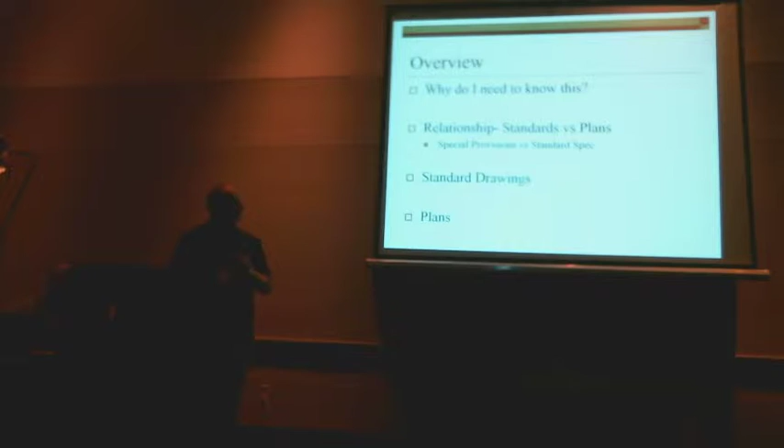So standard drawings and plan sets, why is this important? This is basically what we're going to cover: why do we need to know this, why do we need to understand plan sets, and then the relationship between standards and plans. We'll cover a little bit about the standard drawings and then also plan sheets. So I've got up here our UDOT standard specifications and also UDOT standard drawings, and I'll cover some of those.

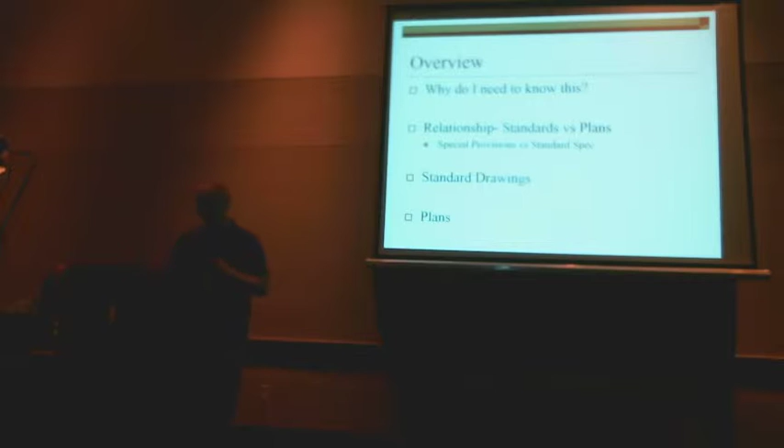Let's go next slide. So starting out in construction, I started with Idaho DOT about 15 years ago. Fresh out of college, they gave me a construction project. It was on a side road off of US 95. US 95 goes from the Canadian border to Mexico, so it's a well-traveled highway, US highway.

Off US 95, close to Sandpoint, Idaho, there's a road that the Burlington Railroad uses. On the side road, there's the railroad, and they were widening the road to accommodate an overhead sign structure that had the flashing lights for the railroad. And then also for school buses, they wanted to accommodate a place where they could stop, open the doors, safely cross. So the railroad was skewed at an angle, and this was also an area where they've had some accidents, so they wanted to do some safety improvements.

First thing going out, the contractor - you kind of have your larger contractors that are used to state construction work. This was the first time this contractor had state work, so he was unfamiliar with how state government operates. Really, going from one DOT to the next, they all have their standard specifications, standard drawings, and pretty much it's the same type of standards from one DOT to another.

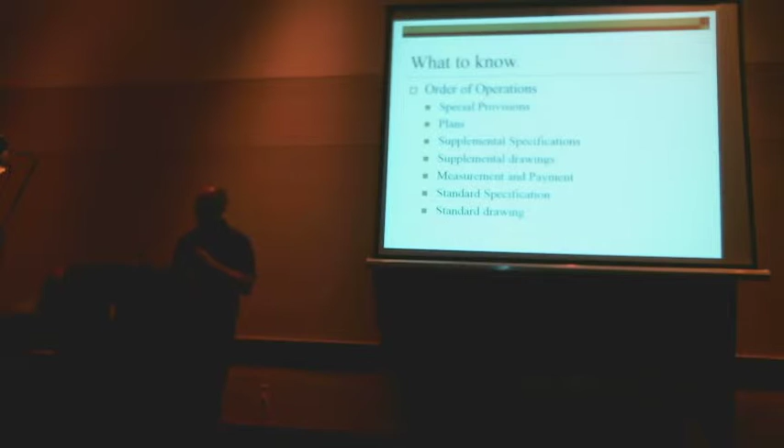In a contract, measurement and payment is for each item of work that the contractor does. It describes how things are measured and paid for. And then the other order of operations are standard specification and standard drawings.

So when do I need to look in the standard drawings instead of the specification? Like the previous slides show, the contract specific items come first, and they'll supersede the standard drawings. You would need to look in the standard drawings when your plans and plan specific items and drawings make reference to them, like on the crash cushions and different types.

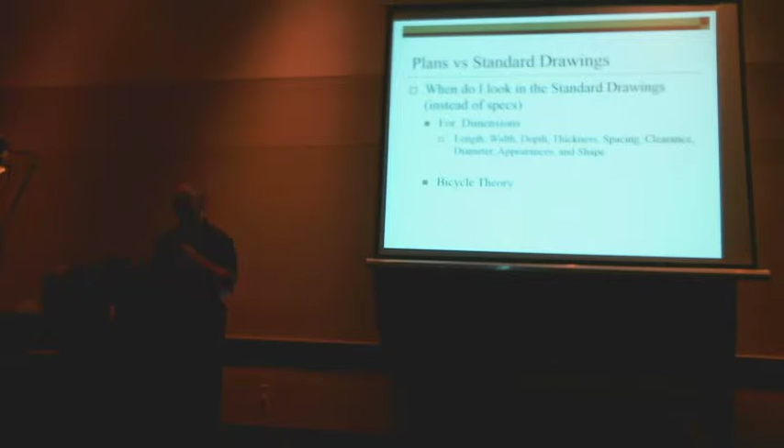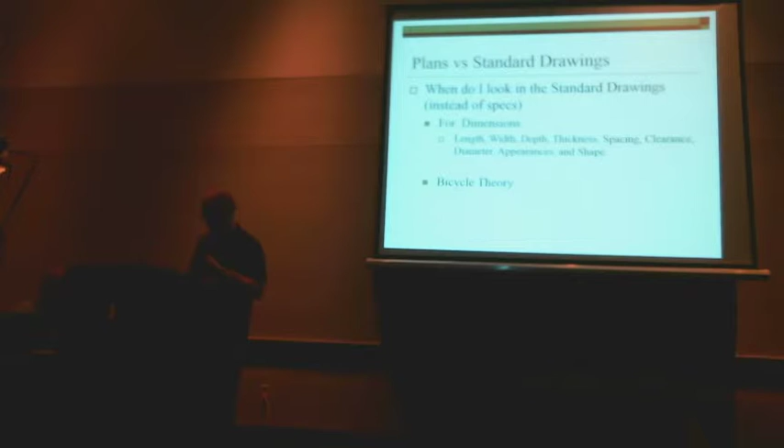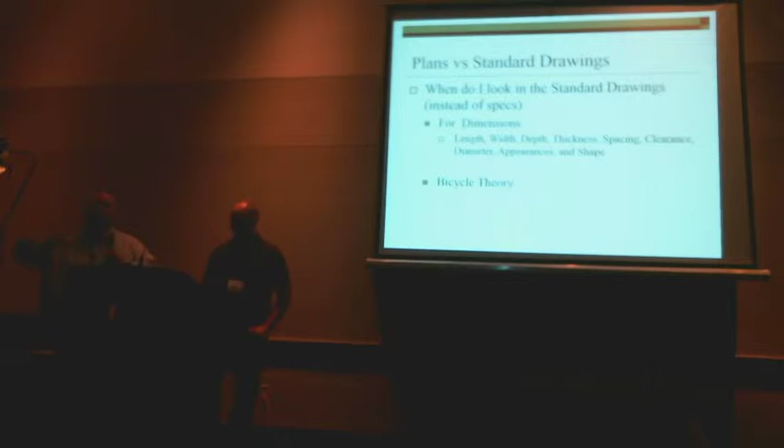What the bicycle theory is: if you're gonna build a bike, the frame will be in the standard drawings. It's gonna tell you the diameter of the wheels, the size of how to build the frame, how the frame is supposed to look. You'd go to the standard specification to know what type of paint, what color of paint, what the seat is supposed to be made out of, what type of reflectors. So one gives you the dimensions, the other gives you what it's made out of.

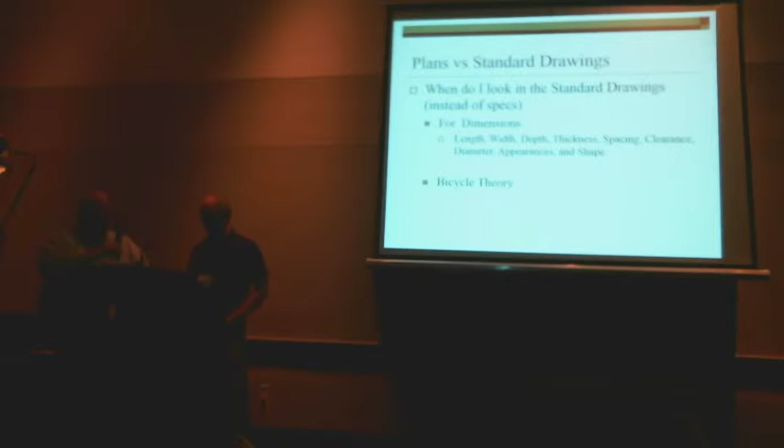Thank you. All right, let's go next.

So like we were describing, the first order of operation when you're looking at the plans is to look in the plan set first and the standard drawing second.

Generally speaking, plans tell you where to build it, and the standards tell you how to build it. Also look in the standard drawings when there's no specifics in the contract, then that's when you refer to the standard drawings.

And on maintenance contracts, and when UDOT does their own work, a lot of times they'll install items of work along the highway according to the standard drawings.

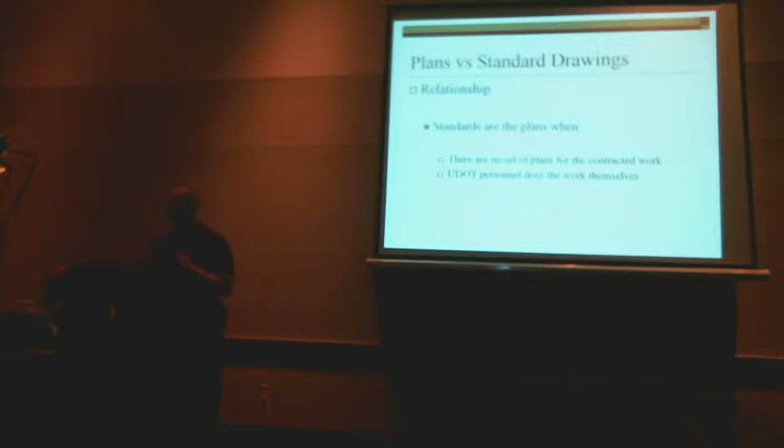On each sheet on the right side of the drawing, they've got a drawing number, title, engineer's signature - the engineer that designed and accepted the drawing - the date that it was accepted, and any revisions to it, all in that same title box.

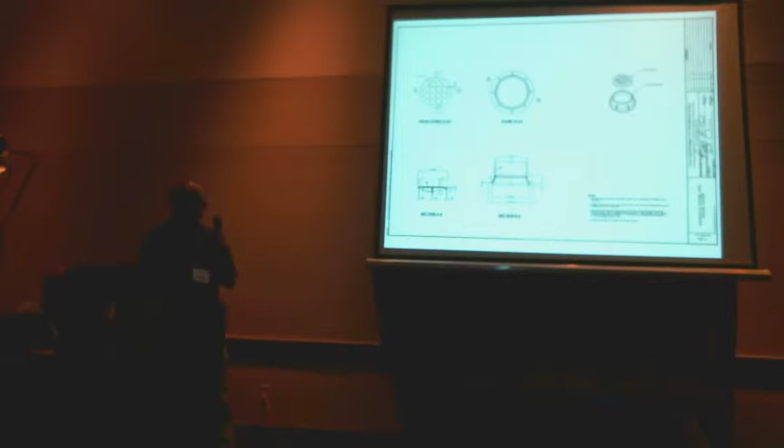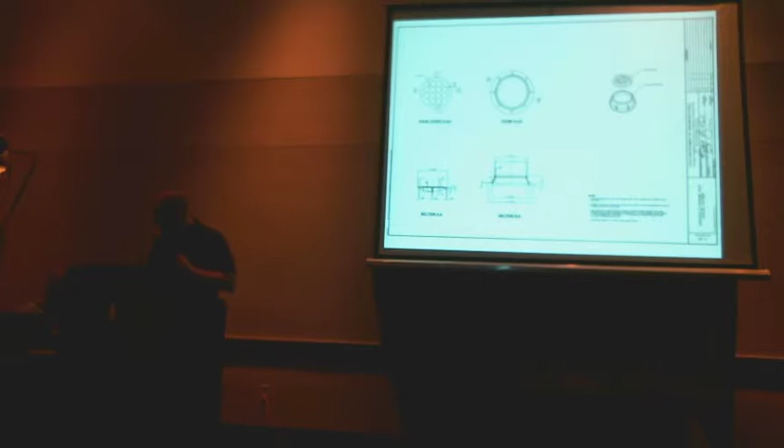And here's that same plan sheet again, so you could see the different views. Section BB would be your cross section. The upper left is that top view looking down, showing different components like the frame. We've got it better described here: you got the plan view of the frame, and then the typical view cross section of that same frame and lid.

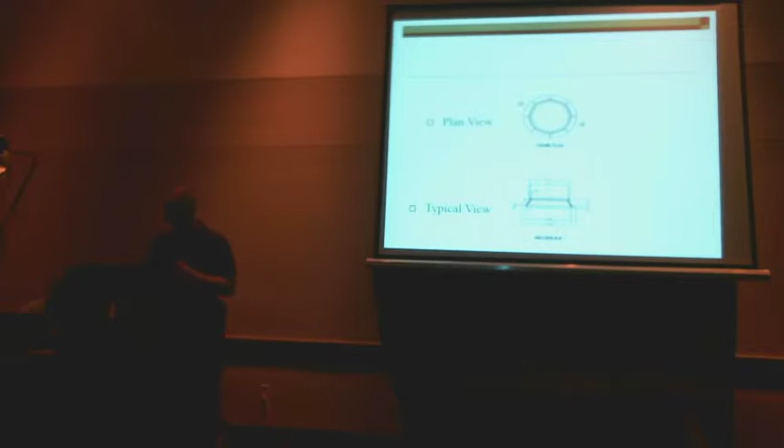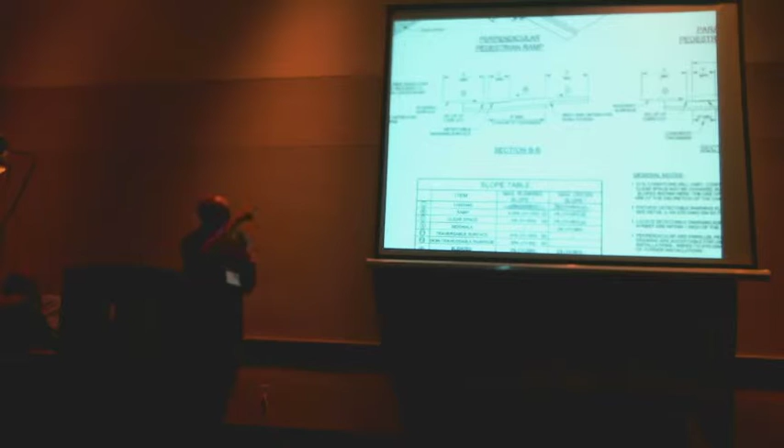Okay, on standard drawings, a lot of times you'll see tables. In the drawing, they might not have enough space to type out the full description of what the drawing entails, so for example, on this drawing it's got a slope table. This is for pedestrian ramps, so ADA ramps have different requirements that every ped ramp needs to meet. You'll see up there, there's the C and the R and the L, and that's reference to this table. So instead of typing out landing or ramp or clear space, all those items, they'll just label in the drawing these different letters, and then that refers you to the tables.

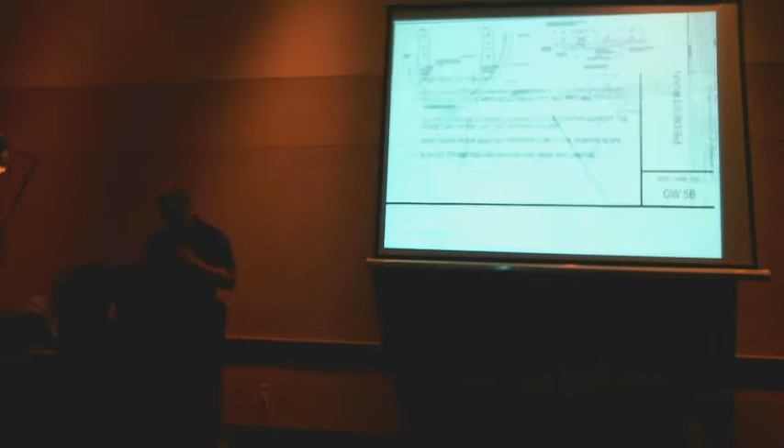They'll also have notes on the same sheet. So here's some other ADA ramps on a different standard drawing, but pay particular attention to these notes. They describe details to each of the ramps that pertain to requirements of installation. A lot of times, like on this sheet, it makes reference to the standard drawings of another one, it's basically the general instructions on installation.

Okay, so now I'll turn it over to Cory.

Okay, like John talked about, that was our standard specifications and our standard drawings. In a nutshell, those drawings can be used no matter if you're up in Logan or if you're down in Moab. That's the standard of how we do things. When we get into the plan sets, these are unique to that specific project. You can't go from one project to the other project and use it. It's for that particular project.

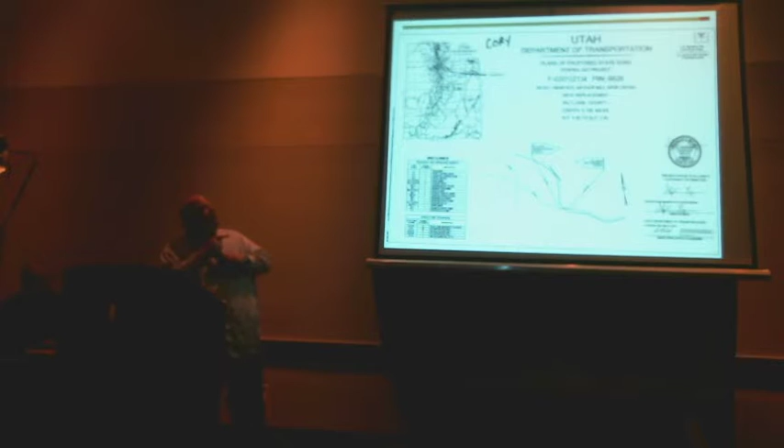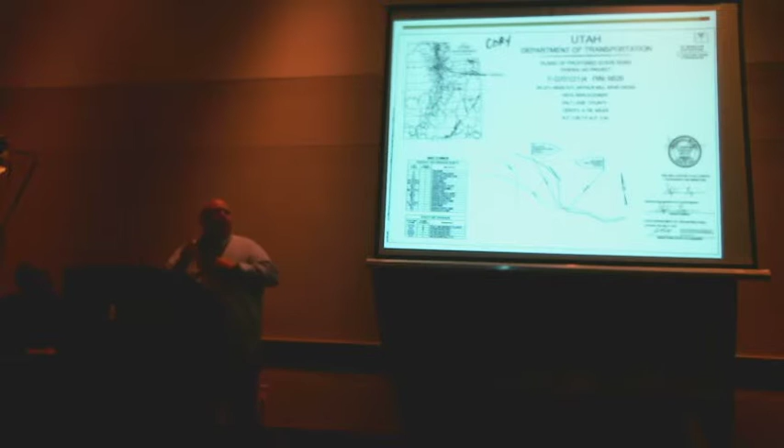Then in the plan set, as you go through it, they're going to have an index. In the index, it's going to tell you what this plan set has in it. It's going to have summary sheets, environmental sheets, your typical sections, your drainage sections. You're going to have all these different sections in there. We're going to talk about what some of these are.

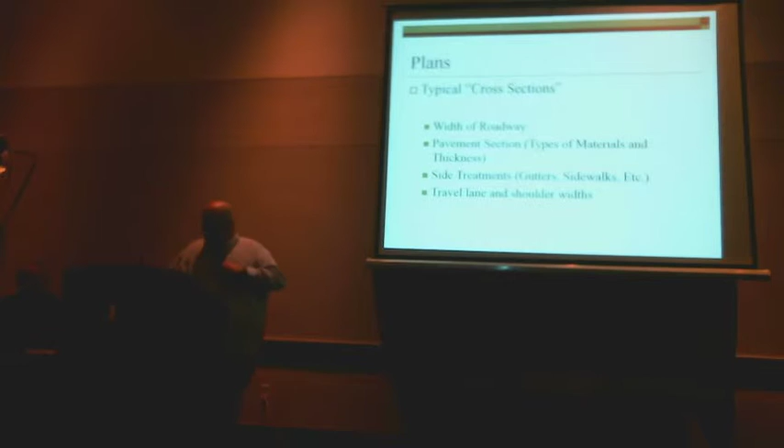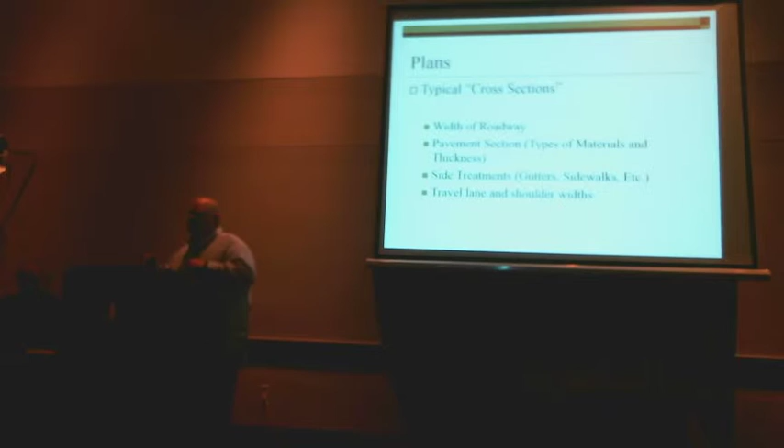Like John said, in the standards we have typical sections. We have them here too, cross sections. They show the width of the roadway, the type of material, side treatments, and how wide the lanes are. How wide are we building this road?

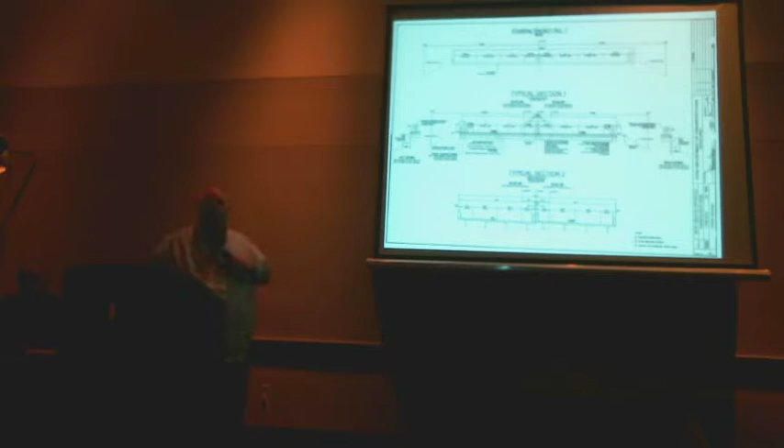This happens to be a cross section of a job we did up here in Region 2, Alpha 201. It's a cross section of the bridge and also the roadway. You can see it's telling you where the barrier's going, how many inches of asphalt, how many inches of untreated base course, how wide we have to build this. This is the sheet that you're going to get this information on. So if you're a contractor or an inspector and you want to know how many inches of HMA you have to put down, this is the sheet that's going to tell you.

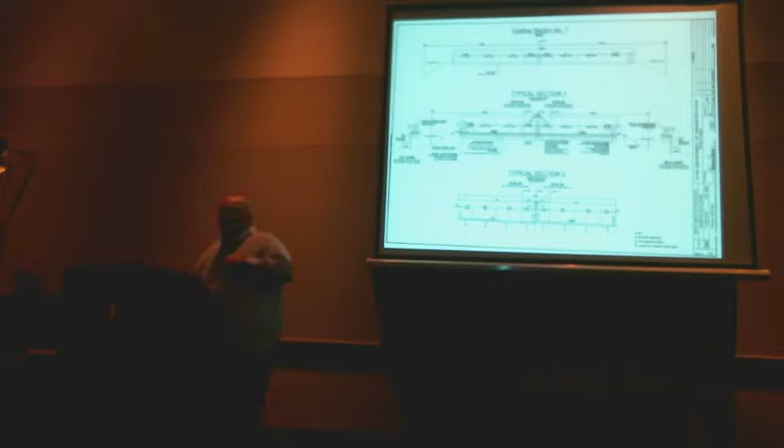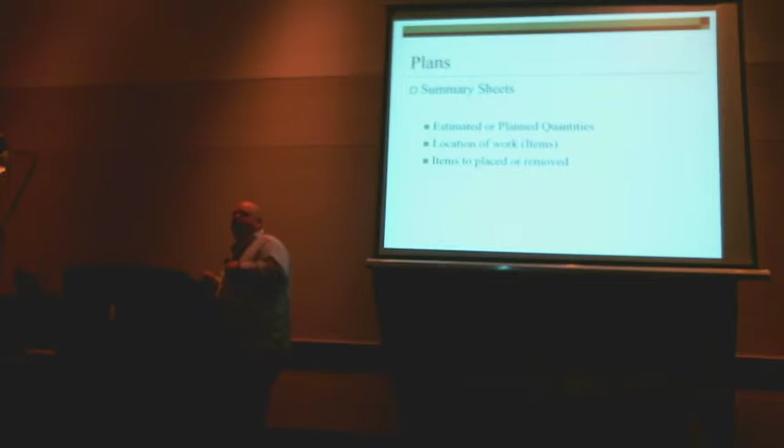Summary sheets, what that is, it's the estimated plan quantities, where it's located at, and the items to be placed or removed. When the designers come in to design the project, they come up with an estimate of how many tons of asphalt, how many trees, how many widgets we got to put into this project. This is where that data is collected and justified for that estimate. It says, like, I got to put in 37 manholes, it'll tell you where each one of those manholes are supposed to be. So you can look at the plan sheets, or you can go quick and dirty here in the summary sheets.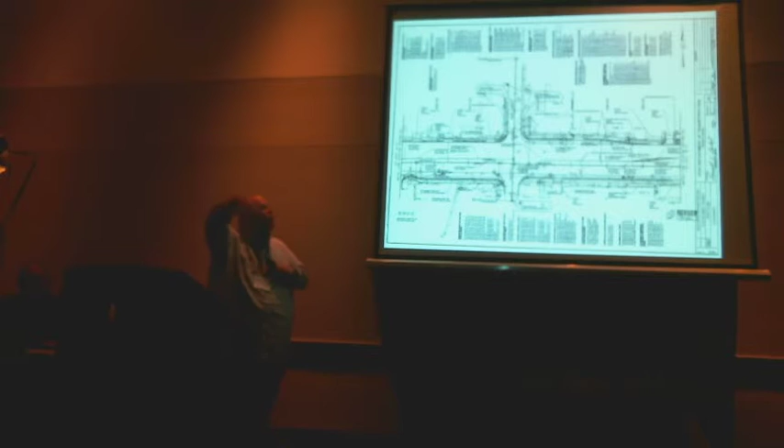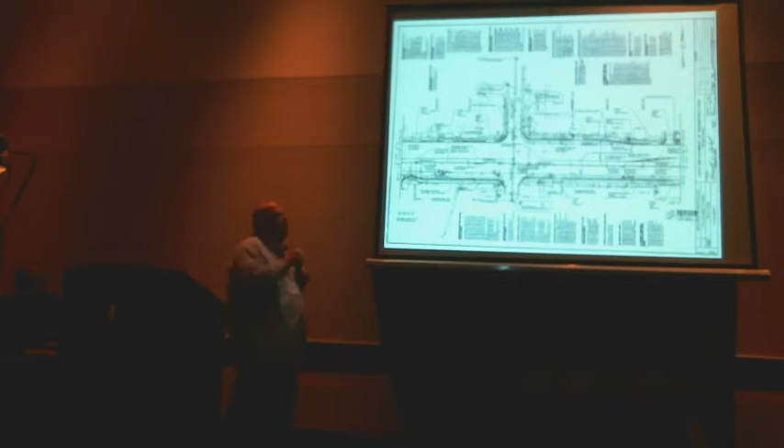Okay, your plan sheets, it's the bird's eye view. You'll be able to see curves, a right-hand curve, left-hand curve, the call-outs. These is what we call call-outs, okay, it tells you what and where everything's supposed to be. This is the bird's eye view, looking down on a section of roadway. Everything is going to be left or right at the control line or center line, and how that's determined is if you're looking either north or east. If you're looking north, everything on the left side is going to be left, everything on the right side is going to be right, same going east. So if you look at these, it's going to have a station number, like 32 plus 15, 37 feet right, you know that's going to be on the right side of the road.

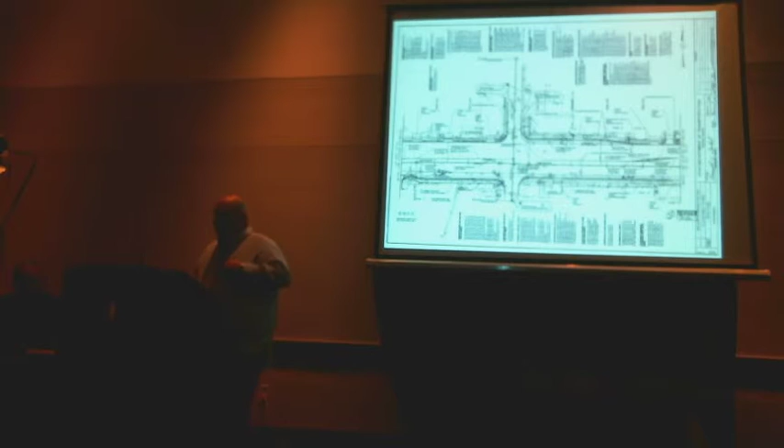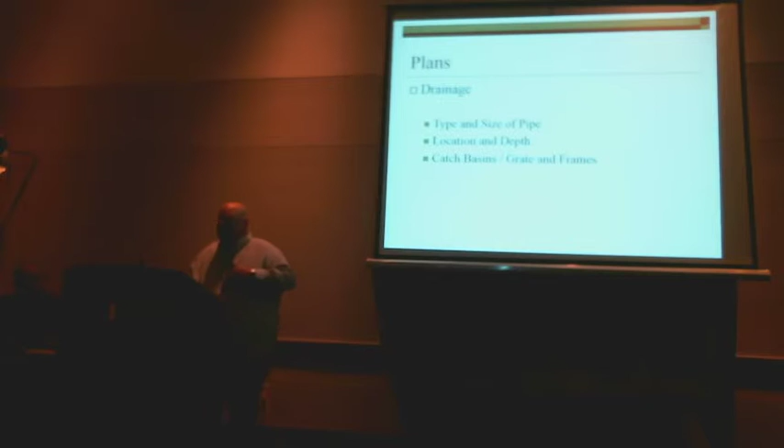Okay, your plans, we'll go into the drainage sections in a minute. It's going to tell you the type of catchment, is it a CB1, CB, whatever type of catchment, manhole, location, depth. It's going to give you the elevations. It's going to tell you what type of catch basin, is it a solid cover or a grate and frame?

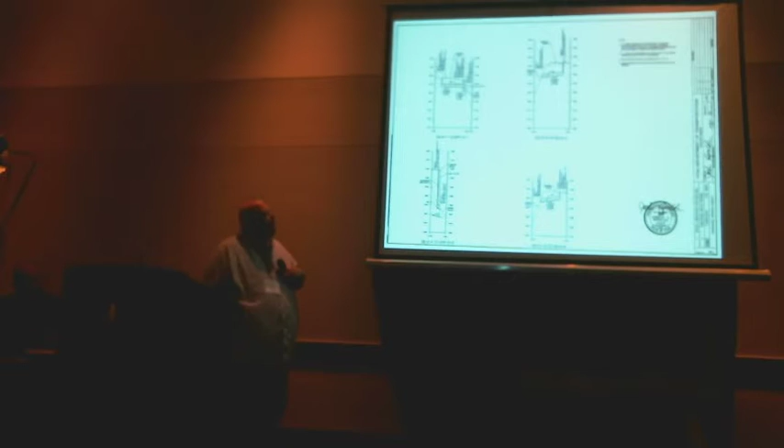You'll look at it, and it'll give you the elevations of how deep this pipe's going to be. So as you go lay this pipe, do you have to dig 3 feet or do you get to dig 30 feet? It tells you what elevation this pipe needs to be installed at.

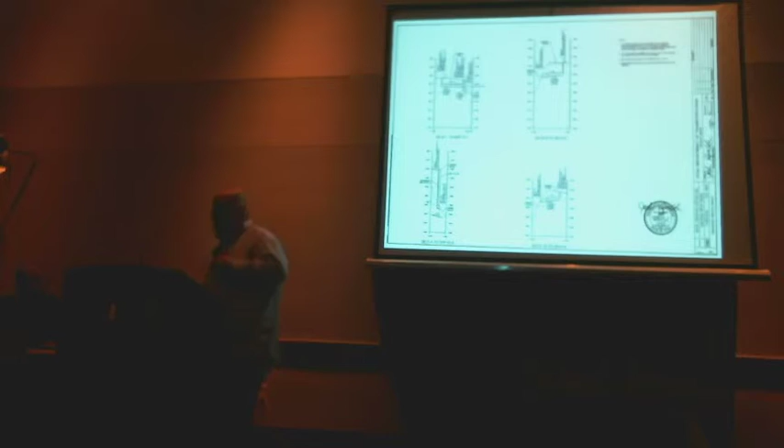Plans profile. Is the road going down? Is it going up? Because the earth is just not flat, it's going to have hills, it's going to have valleys. How do we address this? Is this a fill section or is this a cut section?

Let's go to that. If you look at it, the dotted line is the existing, and the solid line is what it's going to be at the completion of the project. So right here would be a fill section. It tells you what type of work has to be done—is it a fill of 4 feet or a cut of 2 feet? This is where you look.

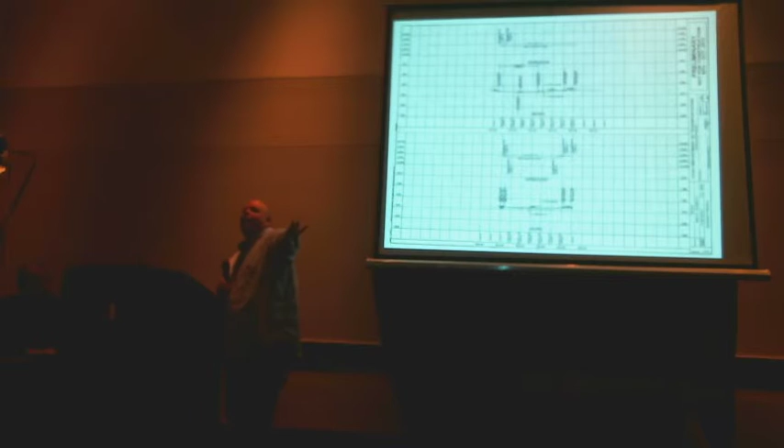Are you also going to see on these type of sheets if there are going to be conflicts with utilities? It'll show the utilities that we know about and a good estimation of what elevation they're going to be at.

In the plans, they also have other sheets found in the front of it: your survey info, detail sheets, project-specific drawings. If something's different than the standard, it's going to be in your typical drawings, in the front of the plan sets.

You'll also have signing on the job. Where do the signs go? What is the legend of the sign? It's going to have your striping—is it a crossbar here, or a stop bar here? Is it a crosswalk? Is it the shark's teeth for a yield bar? It's going to tell you the location.

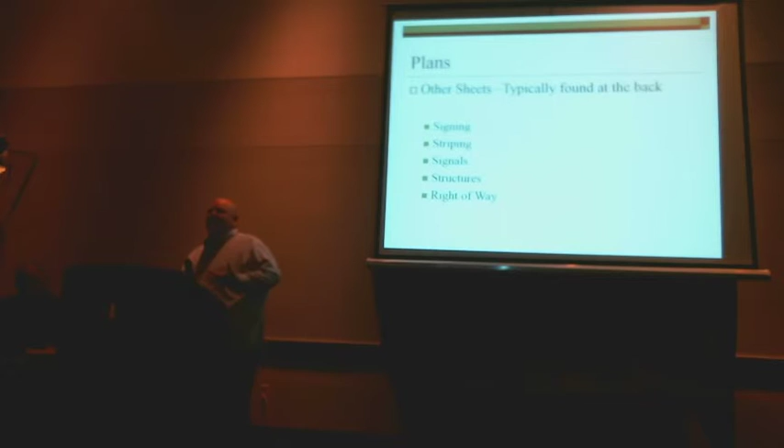Signals. It's going to tell you where we're going to put our loops. Is it loops or is it some other detection? What size of mast arm? This is where you're going to find it.

As the projects are designed and they come out, there are different categories. There's an orange book, a blue book, a purple book, and I do believe there's a red book, but we haven't addressed the red book because those don't come out very often.

What an orange book is, it's a maintenance project. It's very specific what type of activities can be in an orange book. If it's an orange book, the cover of the book's going to be orange, and we know we're not going to go build a bridge. It's rotomilling, thin functional overlays of less than 1.5 inches, surface seals, rejuvenations, lane leveling, crack sealing. Basically that's all an orange book can be. If we want to put drainage in it, that changes it from an orange book. If it's slated to be an orange book, that's all it can be.

Basically, a purple book, in my mind, is an orange book on steroids. We can do some other things—start a little bit of drainage, get into some major rehabilitation on bridges. It's bumped up to the next level, but it's still limited to what these projects can be. If we start adding all this drainage and it's only supposed to be an orange book or a purple book, the guidelines have already been set forth. We can't go outside of that.

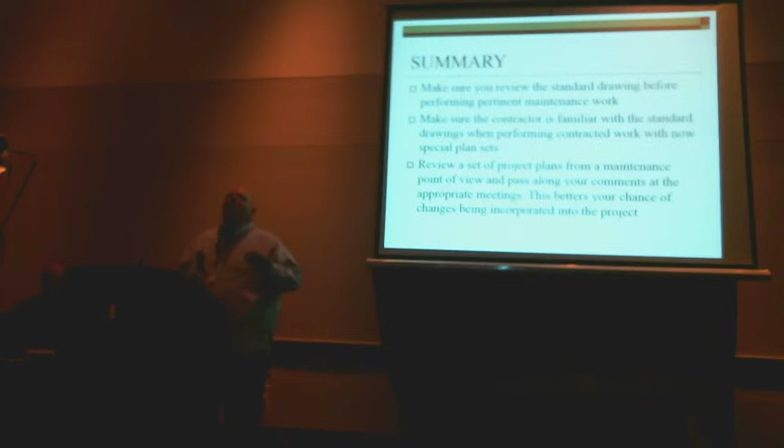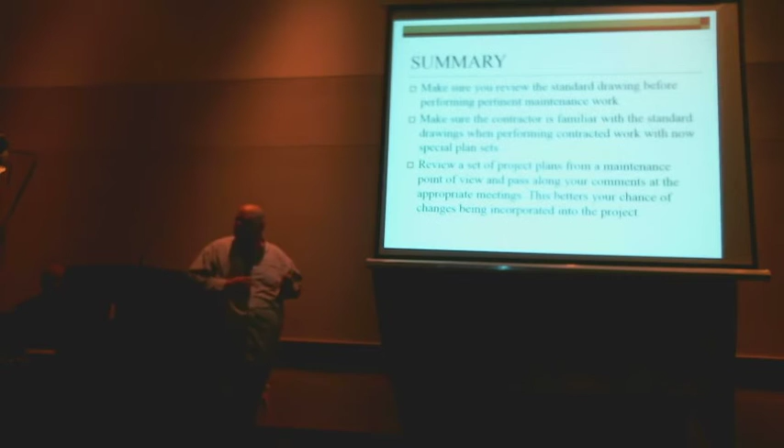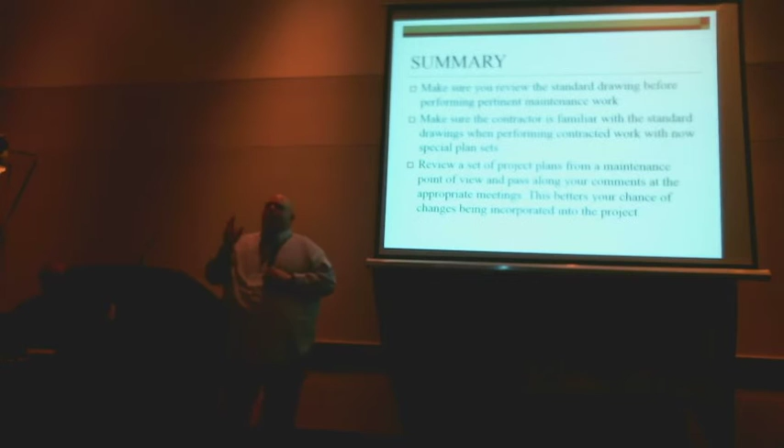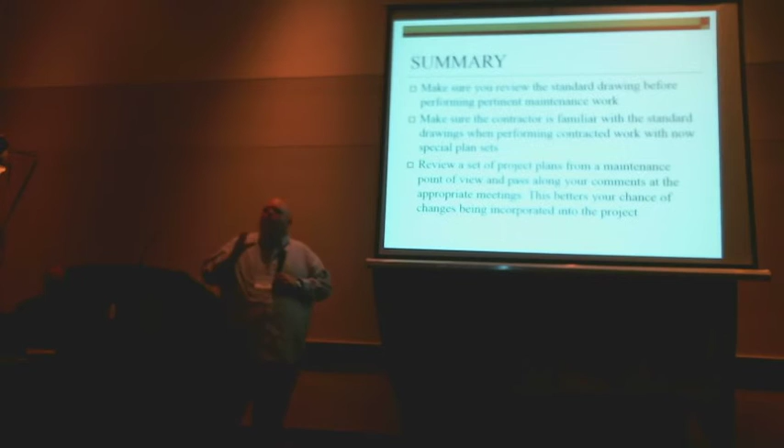Make sure the contractor is familiar with the standard drawings and performing contracted work with the plans. Do they even have the right plans? A lot of times they have the wrong year of standard drawings. The standard drawings have a year - right now we're in the 2012 standard drawings, and that's the year you use. It's specified in the special provision what year of standard drawings and specifications you use. So you can't go back to the 2008 if it says 2012. It's a set, that's the ones you use.

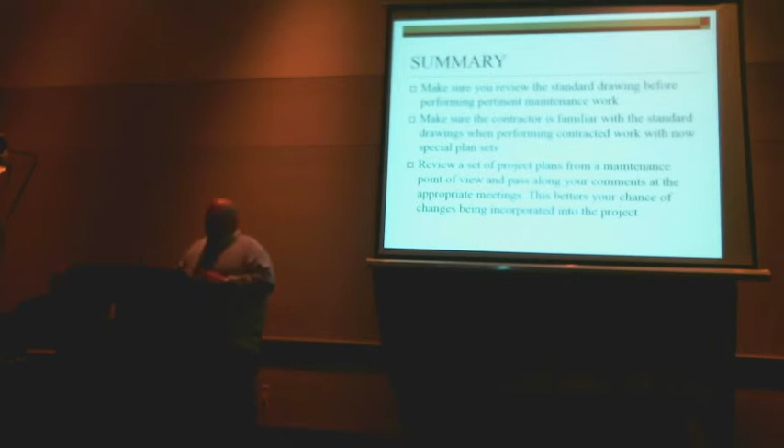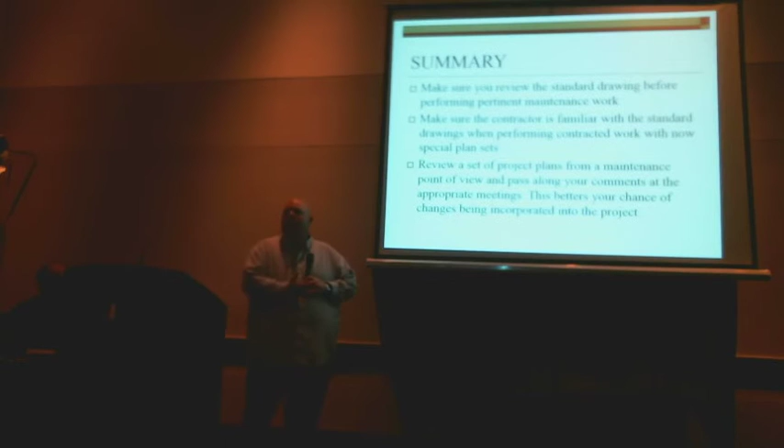Review a set of project plans from a maintenance point of view. We like to see the shed foreman come out on our projects and get involved, especially in the design phases. Maintenance has an opportunity to have more of their input involved into the project if we get it in at the beginning, where it's just the design. It becomes really hard after the fact, after the contract's already been sent out, to change things if it wasn't addressed in the plans during plan development.

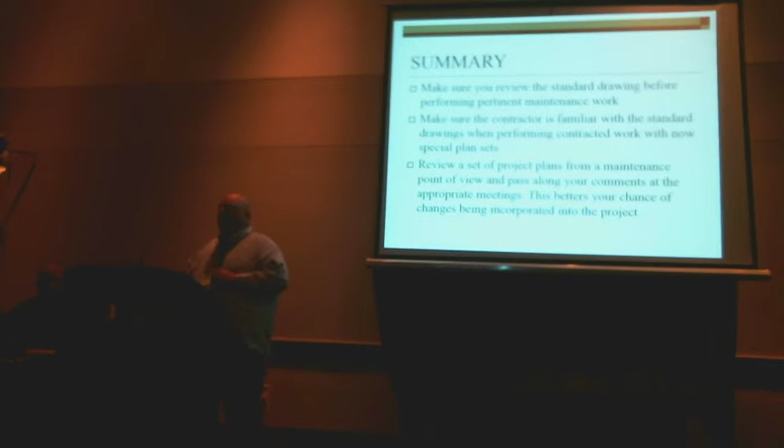Okay, that concludes this. Does anybody have any questions? You had a question back there?

One thing I was going to mention is the color coding on the projects also has a lot to do with ADA requirements as far as technical feasibility goes nowadays. For example, maybe you've got a catch basin in the way of a ramp and it throws it out - if it's not a purple book or a blue book, you might be able to get a technical feasibility exception on that. But say that project was a blue book, then you actually have to do something about it. So that color coding is really important.

That's kind of your design section. So what you're saying is if it's a blue book, you have the opportunity to fix it right, but if it's an orange book, you might not have that opportunity - is that what I'm hearing? Yes. Okay.

Is there any other questions? Okay, yeah, we can do that very easily.